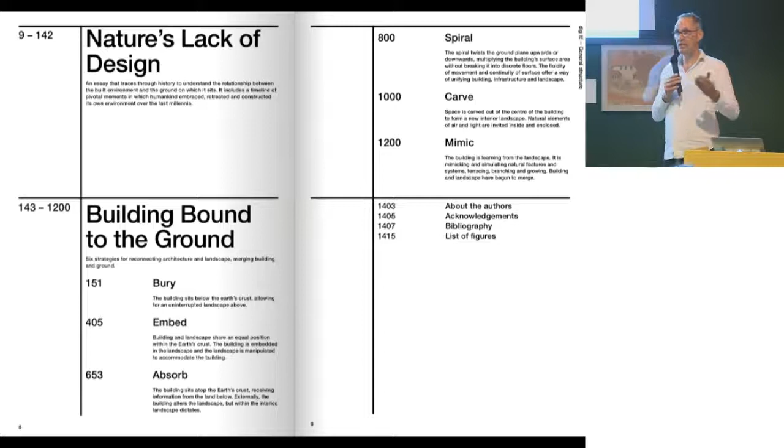And so my question was, how do we deal with that? And then through the history of building, I found out that we sort of took ourselves a bit away from the crust of the earth. We started to first dig in, or build on top, or use a few stones or a few branches or a few leaves or grass. And in time, we freed ourselves from that crust of the earth, from nature. In many ways, we thought we don't need nature anymore. We have to push it aside. We have to kill it. We have to use it to our own best interest.

And of course now we are at a moment where we think, hey, wait a minute. I think we lost something, or we are going to lose something. So we need to reconnect. But over 11,000 years, we have sort of disconnected ourselves from our planet.

And we found out that 1964 -- it's no coincidence that is my year of birth, but of course I just took that moment -- is quite precisely between 1959, the first time we set off to the moon but didn't go, and 1969, when we got on the moon. That 1964 is exactly in the middle. It was in this process of leaving the Earth, almost at the moment that we made the first photo seen from a distance of the Earth, that we could say, hey, that's us there. That amazing picture, not of sunrise, but of Earthrise. It gives you goosebumps if you think about that.

But it was also the only year in the history of mankind that our population growth was above 2%, for one year only. It grew to 2%, so we grew like hell, and then it dropped again. It's a pivotal moment in nuclear thinking and in many other ways. It's also a moment where you could say the building was isolated from its natural environment to the maximum. If you look at Arne Jacobsen's project Vattenfall, and there are many more from the 60s, it had nothing to do with its site. It was just put there, and it only uses the crust of the Earth for foundation, for gravity.

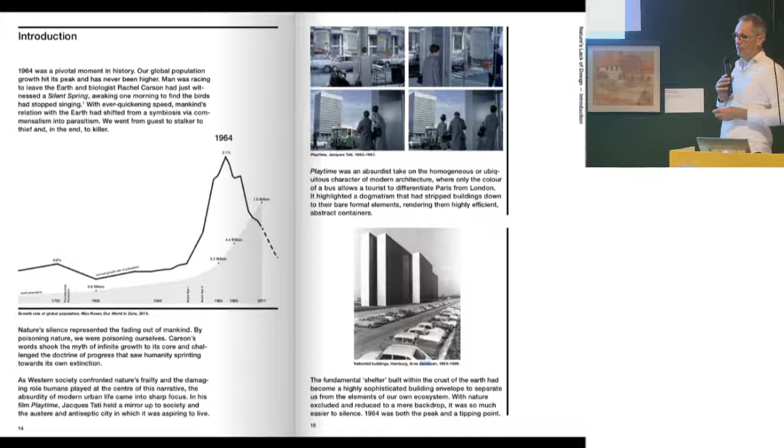We have continued that, and there have been voices all the time, but we haven't acted. There are, of course, thousands of reasons we didn't. And now we're in a synthetic landscape that has grown so extreme it's hurting the globe. We know it, we know. Enough about that.

Well, to come back to Prouvé, he, for example, used techniques he'd worked with in the war, like a little jeep, and this is his house. He just put it together with some strips. He drove up the hill, cleared a little site, and built it. It's extremely light, almost like a tent plus, a little bit more than a tent.

Well, it's still there, and it's a gorgeous house, really beautiful. He didn't destroy the site, didn't excavate, only cleared a bit. So you could say it's almost like you could have lived with simpler techniques 6,000 years ago. It didn't change that much. We could have continued like that, but we did not. This is what we did.

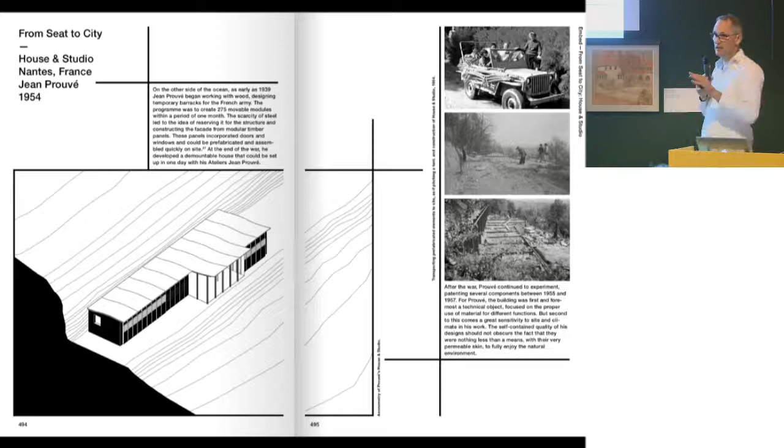This is sort of the first concrete invented building, and then later Zehrfuss, the French, like this. This is a Russian film. It's in fact sort of an opera.

I don't know if you know the film Playtime by Jacques Tati, a beautiful film that criticizes and ridicules modern life. A woman looks at a poster in Paris, then turns back, hey, that's London. The only difference is the bus, the green bus, but the architecture is exactly the same. Then she opens the door, and in the reflection you see the Eiffel Tower passing by. It's amazingly beautiful, of course.

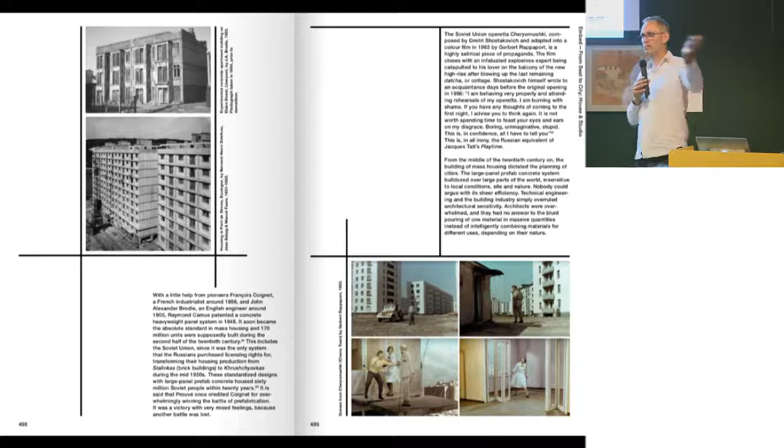Well, that movie bankrupted Jacques Tati, but there was an earlier one, with music by Dmitri Shostakovich, who excused himself for the terrible quality of the music. It's a hilarious idea of an explosives expert from Russia who, at the very end of the opera, explodes his own dacha, his old house, and through the explosion he's catapulted onto the balcony, and then he kisses his wife. At a certain moment he comes onto this balcony.

Also a hilarious movie, quite brilliant. I'm not sure if Jacques Tati saw it. Maybe he did, and that was sort of an influence. But this is reality nowadays.

And then you can also question, well, how do we look at things? Plastic, we think completely differently about this cup now than two years ago or five years ago. Traveling, about whatever, it doesn't matter. It's quite interesting, because this was like the new world. This is how we're going to live. Villa Savoye, Le Corbusier.

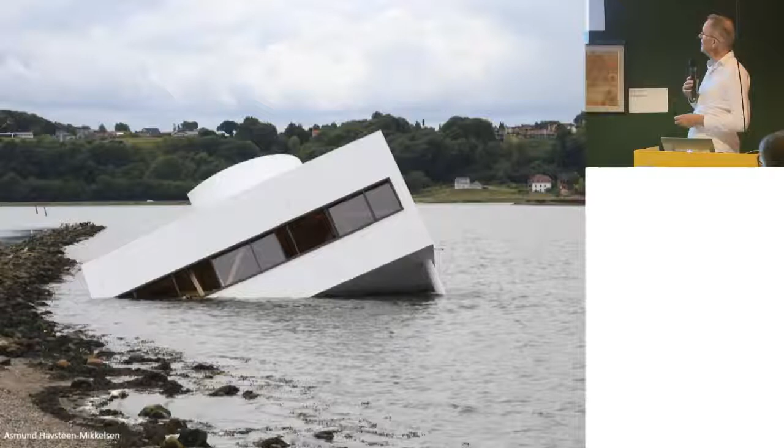Recently I was there a couple of years ago. Amazing, I mean, like an amazing... it is the future. But this future never came, not because of the quality of the architecture or the quality of light, etc. But life is, of course, much more complicated and much more interesting. It's used also by artists.

Somebody called it, the name is, you read it: Asmund Havsteen-Mikkelsen, who put it in a lake, as if, this is of course not the real one, and it's used also like this. I mean, it isn't deteriorated, this is just photoshopped by another artist, Xavier Delory. So it says something that different artists have used Savoye to sort of kill it in a way, and you could ask yourself why.

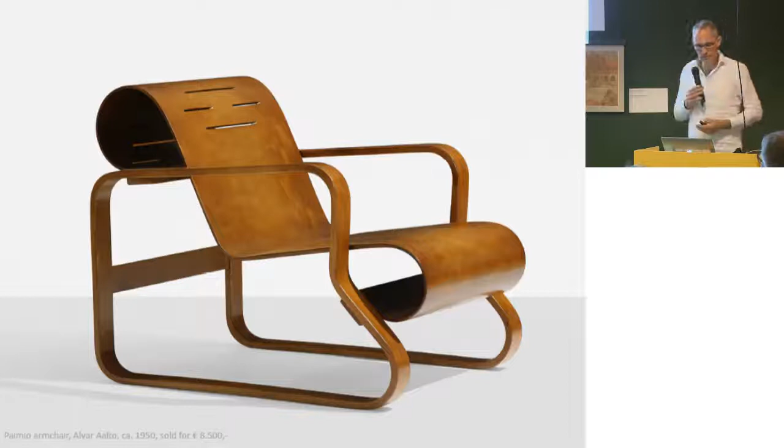So we have to rethink materials quite a bit, and that's what this evening is also about. It's about building, you say buildings in wood are better, or could be better, or maybe it's a solution. It's much more a discussion about using other materials than what, steel, concrete. So I think there's much more behind that whole idea of let's promote wood. I think it's about let's promote another way of living.

And you also see this Aalto chair. On auction, I think it was like 8,000 to 9,000 euro. It's just a crappy chair of wood, you could say. You could look at it like that, let's say. But people pay a lot of money for that chair.

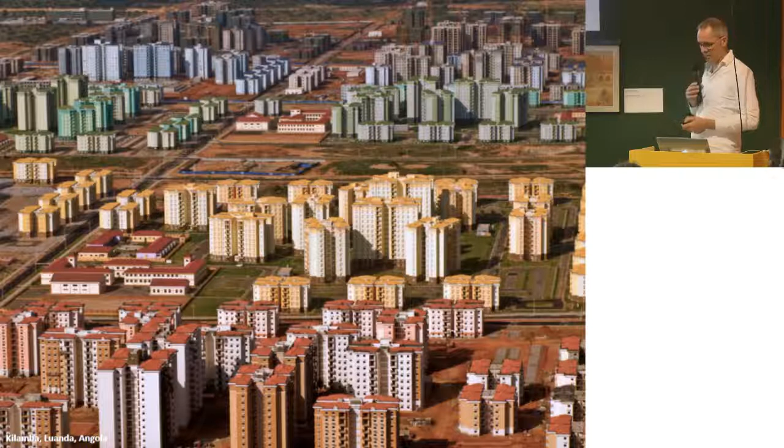First of all, you can drop through this immediately, but you can't get on it. This is not a model or something, it is really a photo. It's a still from a film by the BBC who is driving through it. Nobody wants to show it. It's a ghost town, nobody lives there. They have hard times to sell it. It looks really, so it's a business model.

And I think we first have to kill that and then talk about how we're going to build. So talking about let's build more in wood is, for me, I can tell you, and we can all agree here, it will never happen. It will only happen if we change the rules in this world. And if we change the rules, then we are going to be able to change the way we build and live, etc.

You do need a level playing field for the whole world, more or less, or for the whole Western world, to be able to do that. Otherwise, there's always somebody who sneaks around the corner and says, I can do it cheaper.

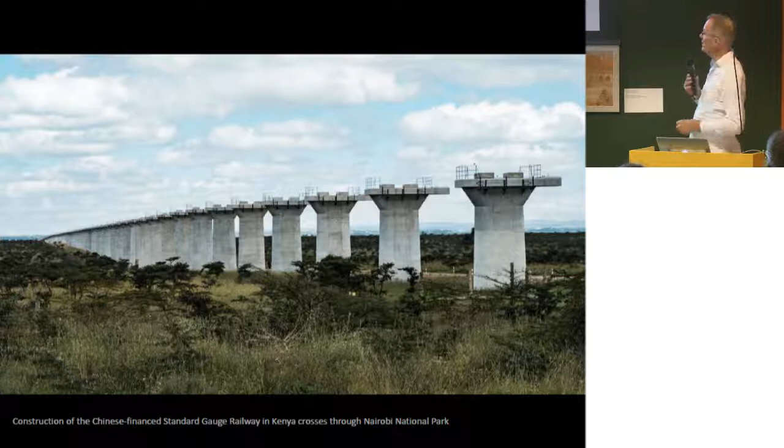How do we deal with that? First of all, as I said, it's quite troubling times to be able to work in a way that is also morally and ethically sort of okay, because many clients are in it for the profit. They are in it for the building share, for the market share.

And at least in Holland, architecture is pushed out completely. So now it's a business model, and then, okay, sometimes they need an architect to do it. But quite often, as long as they have found out how to do it really cheap and really fast, they don't need that architect anymore. They just do it without. They copy, paste, they multiply.

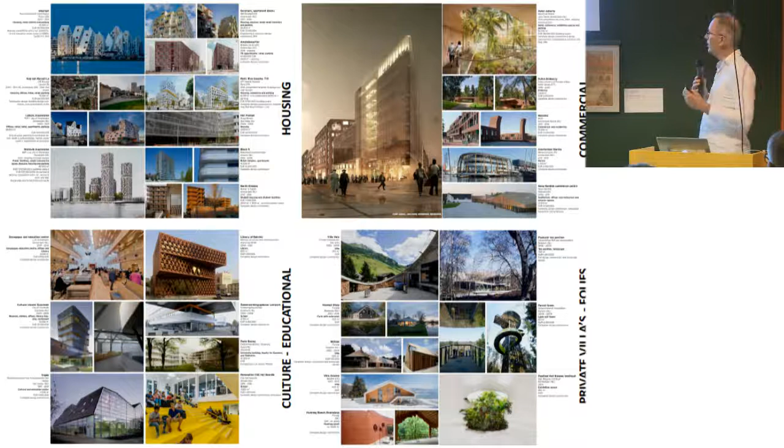But we have been extremely lucky that we also have found private clients to do special stuff, or commercial hoteliers, I will show you in a minute, where either the client or the municipality simply, and that's what really happens, says, you can only build this hotel here. There's a hotel stop in Amsterdam. You're not allowed to build hotels here, for example, unless it is extremely sustainable and it adds something to the city, and you tell me why. And then you see people start to think in a different way, because they know they can't build the simple concrete steel hotel.

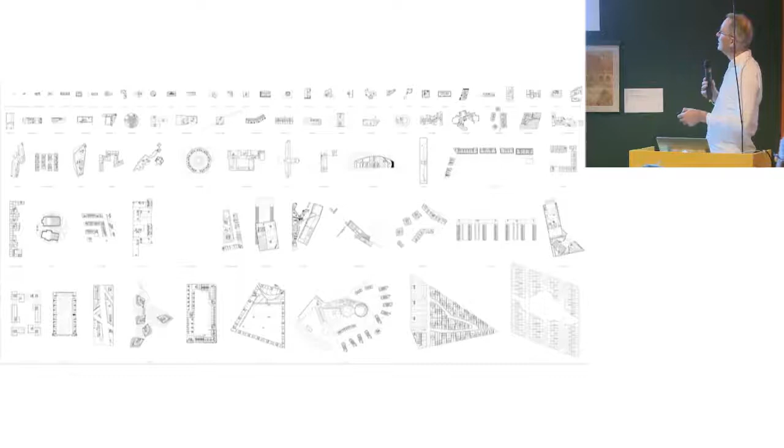This is all what we did, project from really small to really big. A 10, 12 square meter kiosk in Amsterdam, and then big projects up to 110,000 square meters.

And then, yeah, how is wood in this? With wood comes also prefabrication, because in-situ timber constructions are extremely rare. So it is also about, and that is in a way a very interesting change, that the idea of the house as a machine, as Corbusier intended, or Prouvé, or Eames, it never really set off. It never really ignited a real change.

But nowadays, with the robotized construction methods and CNC mills and much smarter factories, the whole computerization of building brings it in much more. We have a few advantages now to build in wood, instead of this old-fashioned pouring concrete thing with a lot of dust and a lot of CO2 production. So there are a few advantages. That is good, at least.

We found out that these are all the projects, from black, where there is no wood whatsoever in it, to completely white, where it's only made out of wood. This is a timeline of our projects. It was 1992, and this is 2019, and you see that it's getting whiter. So we are doing much more in wood and prefabrication nowadays. There's a real shift.

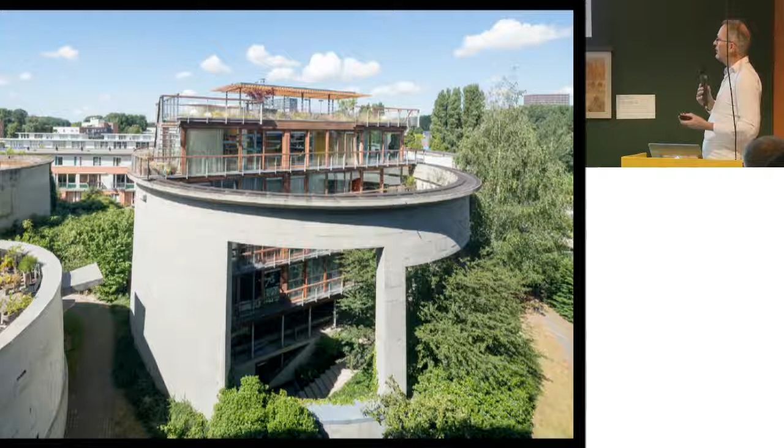Because we just cut it open and said it has an extremely strong foundation, so we can use the stability and the foundations, and then we build something and that's it. So it's sort of fun to do it.

They thought it was not fun because the neighbors across the street came in with baseball bats and kicked out the construction workers the first day. They were so mad that the sewage tanks would stay instead of go. But the funny thing is that these same people, who had to be separated by police from the construction workers, 2 years later opened the project - they loved it, they changed their mind completely. I was extremely proud that we were able to convince them in the very end that this is fun. And now they have this amazing park in front of them, with some sculptures in it.

Here we also started with prefabrication, where you were able to do a do-it-yourself house, using blocks and terraces and things. We didn't know where it ended.

This was the first thing we built with wood - an oak wood structure in big trusses, big cantilevers. We thought this was a very sustainable building because we used heat regeneration, etc. Now, 15 or 20 years later, I laugh about it because the sustainable qualities of this building are completely outdated. But at least it brought us somewhere - it started something that we like very much. This is the structure, partly steel, partly wood.

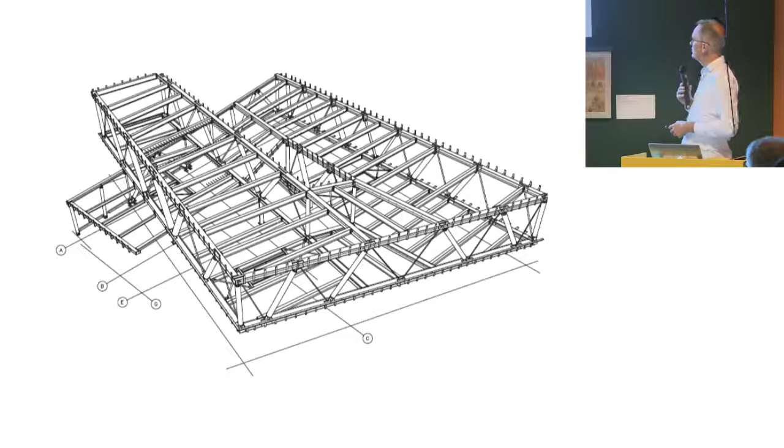And that is what it ends up probably being anyway in the building industry in the very end - we will always use steel as well, and we have to go a long way to really abandon those kinds of materials. But it's also about collaboration, I think. Since we're living with 7 billion people on this planet, and in the near future 10 billion, there is never one solution that's the good one. Is it electric driving? No, probably not only electric driving - it's a combination of things. Because whenever you say, oh soya beans are right, then 5 years later we find out that planting so much soya beans turns out not to be right. So in large quantities, nothing works anymore. I think we have to make a construction that is extremely much smarter. It's about smartness.

We really don't know nothing, we are sort of stupid. We like to design, but we research, we are detectives. Whenever they ask us something, we really go deep into it and come with a solution. It's about the doing thing, investing time and talking to producers until we have the solution. It's extremely about asking the right questions, a lot of questions, not only the right ones but also the stupid ones. Ask questions and try to find a solution out of a problem. So we experiment a lot, we research a lot, and then we find that solution.

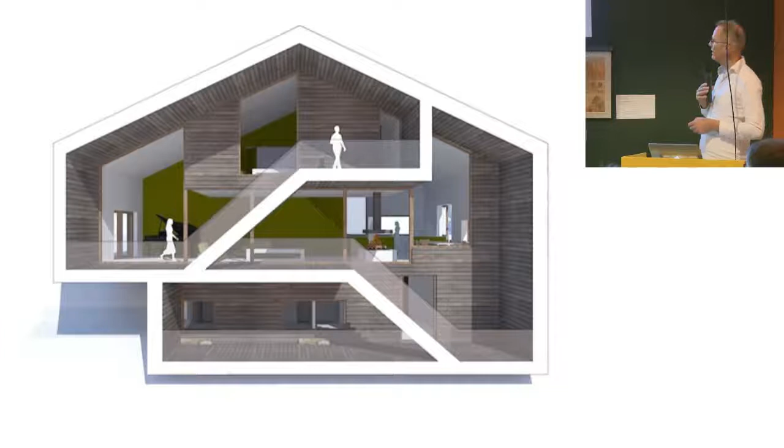So this is how we sort of deal with a problem where a client had already schemes from other architects and couldn't solve it, and it was too big, too expensive and too complicated. We simply brought it down to one small chalet, one compact chalet. The rich people nowadays build these sort of multifaceted chalets, like a car crash of 10 small houses. It looks terrible.

A car lover, he had problems. The solution here lied not in the house, not in the architecture, but he needed a road up to the entrance side of the house, and then he has to clean that road in winter himself. It's very expensive, and he has these Porsches he likes to race. I said, this problem with all that snow, I don't know how to solve it.

And we found out, well, just build the garage at the other end of your plot, because there's a road as well. We take an elevator up, sort of James Bond, very nice. Since then he was wax in my hand, like wax. He loved it.

He also didn't understand that we put a stair in front of his view, his most beautiful view. But that's of course our sort of cliche as architects, that you would like to have a nice sculptural quality at the front of the house and at the back as well.

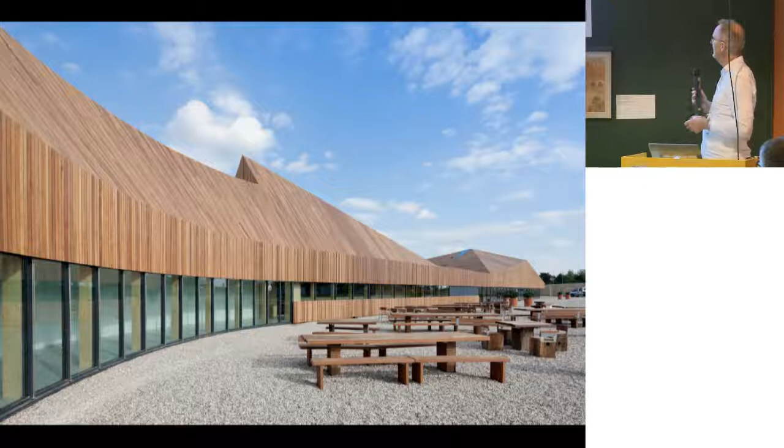So we continued our search for new constructions. This is Denmark, quite some time ago already. Experimenting with an idea of 10,000 square meters enlargement and still having the old barn as the main building up there. And again, we played around with CLT and wood constructions to come up with a solution that pays tribute to the wooden barns you have everywhere in Denmark.

So that was a bit what we did around construction in wood. It went everywhere, it didn't have a real sort of perspective. But yes, it's an extremely nice material to work with. You have a lot of freedom, you can tweak it, you can change it, you can glue it.

Here we did in Bahrain a small project, a small library. We wanted to make a beautiful wooden facade. Well, sometimes it goes wrong, because here they made it in sort of a fiber concrete. They changed it completely. And then, yeah, I mean, it's sort of okay.

But it would be nice to make this building much more intelligent, because they don't insulate buildings. You need to insulate buildings, not for the warmth going out, but for the warmth not getting in. So we wanted to make a building without ACs.

Or very simple, prefabricated - this is a synagogue that we built with mostly simple off-the-rack building elements that you can get in Holland. It was quite a cheap building. And we saved all the money for the shul, for the main synagogue space, to wrap it completely in wood. That's more or less a 7-arm chandelier.

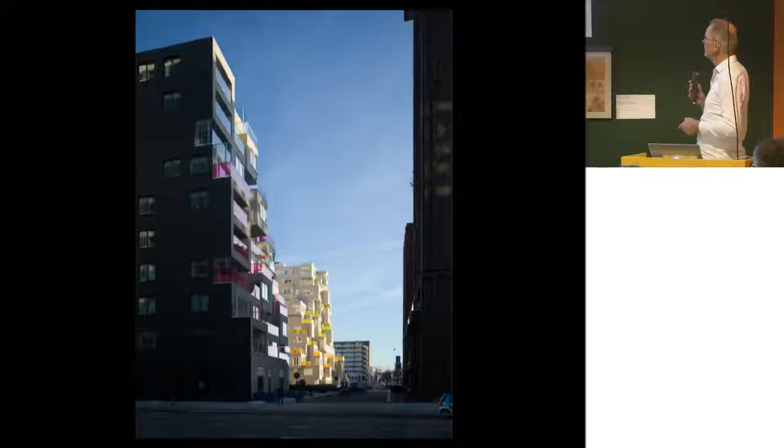So you see, it's a massive building industry, and it has an enormous power. And then the question is how to tweak that.

Well, then you can get a client that says, I want to have a new hotel, although hotels are not allowed anymore. But let's build something that adds quality and that is highly sustainable and that is also built in a different way. So we did this tender, and we won because of our approach on this.

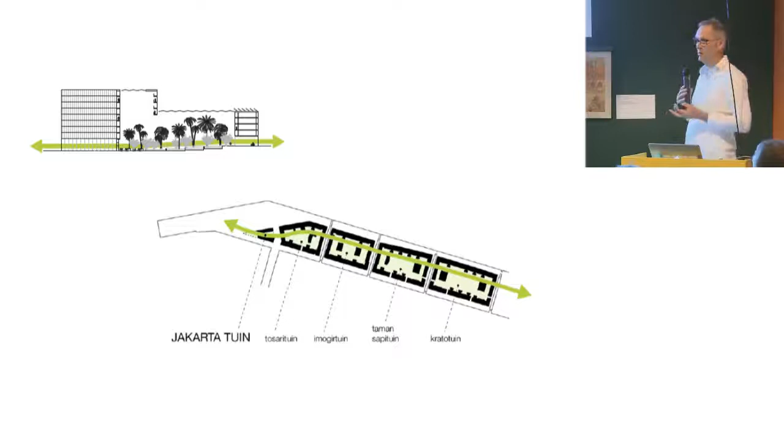And let's team up with the Hortus Botanicus. So the whole idea was not only about wood, it's about linking your building with the history of Amsterdam and Jakarta, of linking with a history of colonization and decolonization.

So we came up with the idea of building 180 units of full wood out of the 200 rooms. There are a few rooms that you can't build in wood because we needed to tip it off and add some corners. It was impossible. But here, like 80-90% of the rooms are prefabricated units, completely finished, and then hung in, and then tacked on.

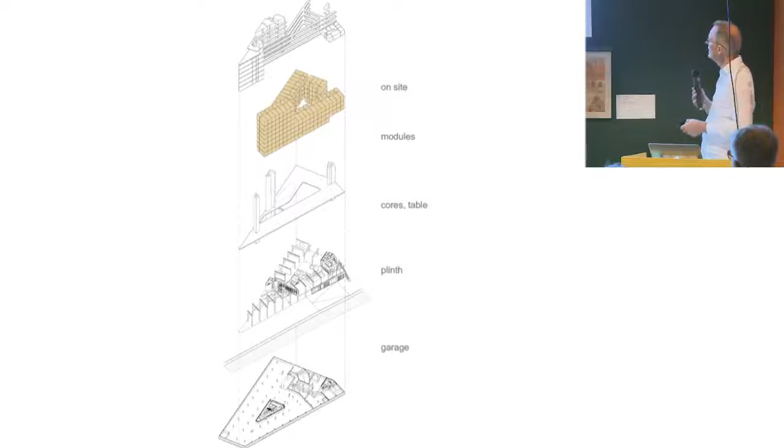It's sort of a plug-and-play hotel room. And see where we can get. And with this client, it was amazing because he said A, but he also said B, C, D. He really continued in this whole idea.

And we used the idea of a perimeter, one corridor, but then only on one side the rooms, because it is a very complicated site. Keeping open a huge space here that you can fill with auditoria and the banqueting hall and the swimming pool, etc. But having no daylight, we said, oh, let's not do it. Let's just fill it out until we are there, and then we keep it open.

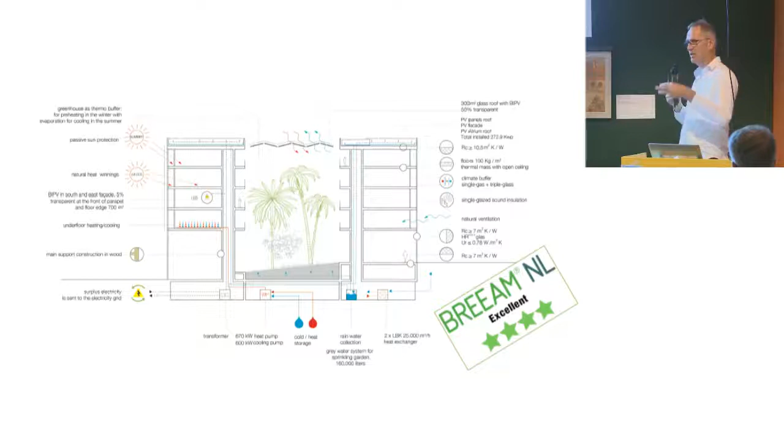We maybe use this idea of a little piece of Indonesia in here, this small jungle, and let's see how that can help the quality of life in that building.

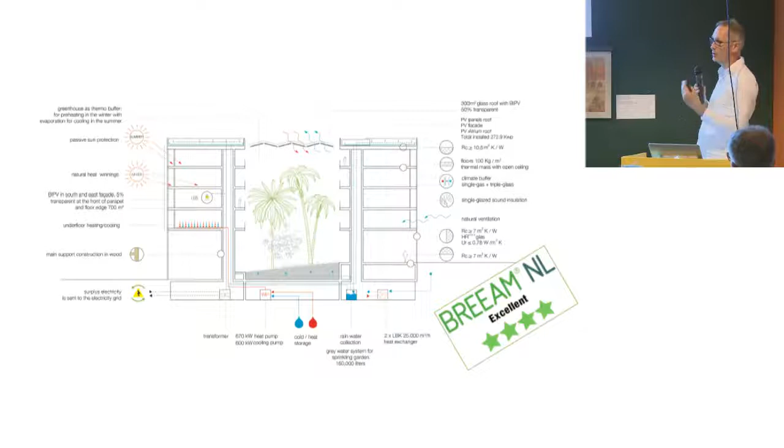It started at that, and we made this one scheme for the competition period, and it is amazing. This is one of the few buildings that we didn't change after 5 weeks of designing. It is exactly what we designed in 5 weeks. It was built like that, no changes. It maybe became only better in a way. It has 1,700 square meters of PV cells, so it is energy neutral completely.

And it's built in a very different way, and because of it is built in a very different way, it looks also very different. Not because it is designed like this, but simply because it is engineered like that. And we said when we built with cross-laminated timber rooms, there was one thing for us that was extremely important. We want to see it, not hide it behind gypsum boards or paint it or whatever. We need to see it, to show it.

So it's built with over 2,000 cubic meters of pine. And then we have finished it off, as in Indonesia, with all the finishings are bamboo. A fast-growing material, very recyclable.

So this was the drawing we made during competition phase, and that is exactly the way it is. So it wraps around a high bridge, comes down here, and then it's to the low quay and goes down under the bridge. It all connects at that level, and in these differences of levels, we have this sawa, this sort of stepped garden, where you now have amazing water views, harbor views.

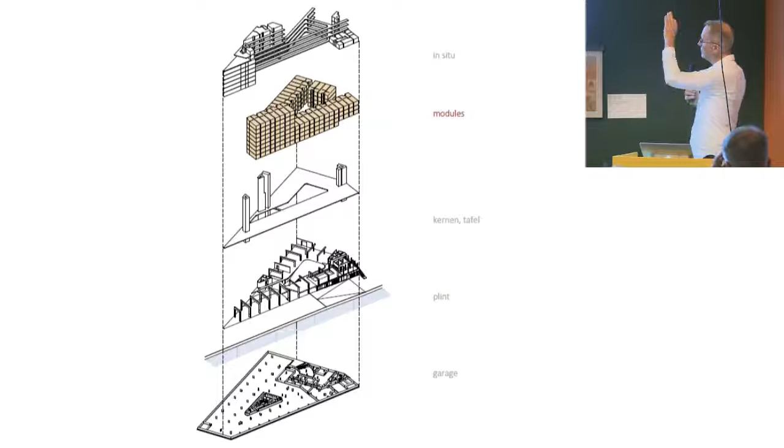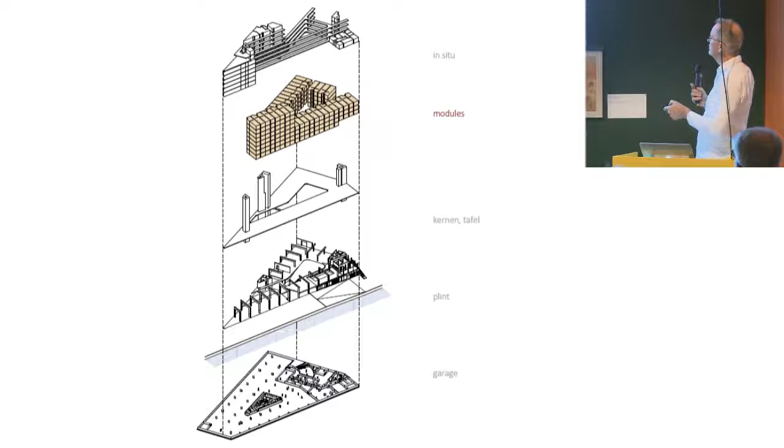And so building up this system altogether, as of this table structure of concrete with the parking garage, as of that floor, it's all structurally wood, so there is no other material that keeps it up to 30 meters.

And you see them being hoisted in. And funny enough, you see that building on site for the lower levels took about 1 year. I was quite amazed. And then they were able to hoist in this in 10 days. So then you saw in 10 days, it was all there. But since it was finished in the factory, it was also finished.

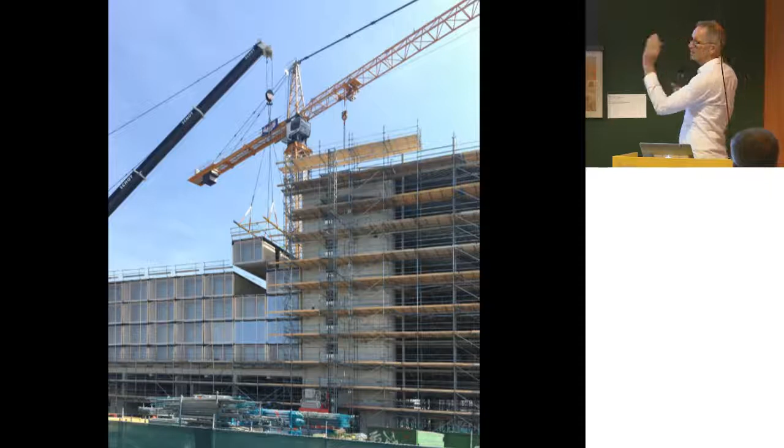And then they wrapped around this facade of glass, quadruple glazing. So this was all built in the factory.

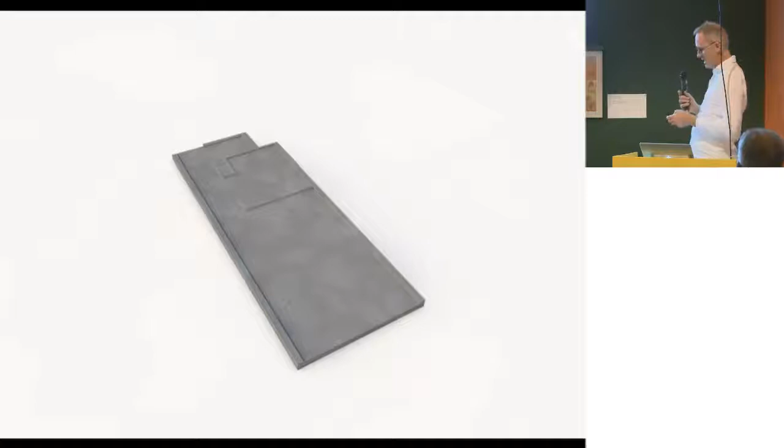We used a very thin layer of concrete for fireproofing, soundproofing and weight. But we needed only 1/4 of the normal weight because we also have wooden ceilings in every room. On that base we have cooling and heating in that floor. So it's like a smart slab.

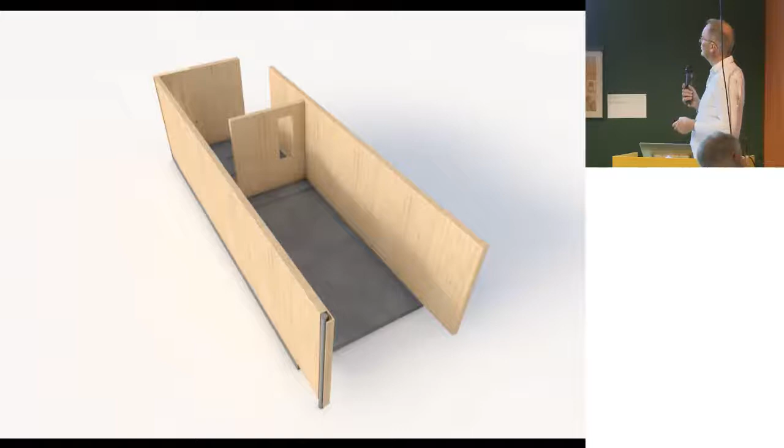And there goes all the material of wood in, also carrying the balcony, triple glazed window, bathrooms, single glazed balconies and PV cells that can be hoisted in like this with the standard units.

And as said, the suites, the most expensive rooms in the tip had to be made in situ. They could not do that because of stability in wood. So that very last tip is made differently.

And we topped it off with a sky bar. It feels like a glass house, so we're going to put in trees and a hanging garden. That's what we're going to make here.

For us, it's quite amazing how much this has ignited questions from other clients in Holland, Germany and France. We're having excursions here about four times a week already for more than a year. Where it brings us, I don't know, but it's amazing to see how many people are interested in this sort of change. And I think that's the most important thing, that we don't push it, but that we wait for them to come to us and say, yes, you better do it this way.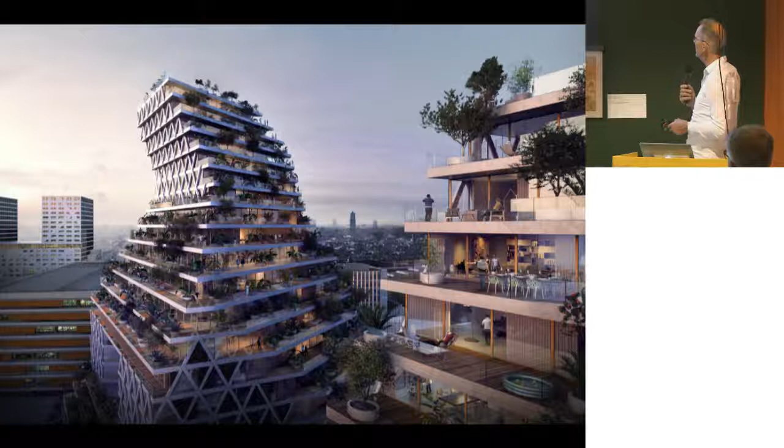So these kinds of projects now pop up where they want to experiment and try to make this sort of healthy urban quarter in wooden towers. Where this ends up, I don't know, but the engineering will take quite some time.

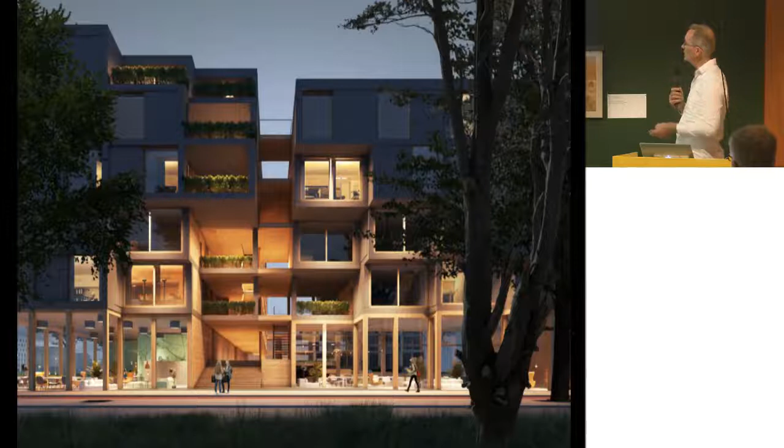But at least the first project that we tendered and won is this one, which we're now going to do fully in wood, 60 apartments. I think it will be a hell of a job, since apartment building in Amsterdam is extremely cheap. Your building costs are extremely low, although prices are high, but most of the money goes to the municipality for land lease. It's a very rotten system in a way, because whatever you want to put into quality of building is taken away and goes to land lease. But we're working on this very hard.

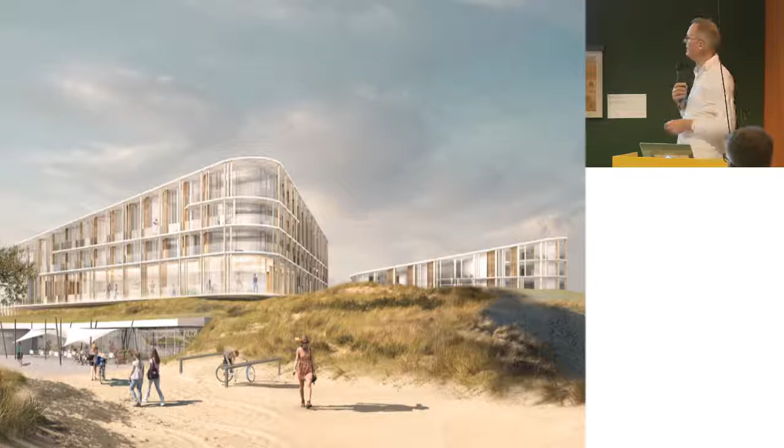And also in hotels, in very difficult areas along the coast, we are asked to work with the same type of building system. This is a beautiful dune area. There's now an old hotel that uses an amazing amount of oil in its heating system. It's worn out, the rooms are bad, and they want to just tear it down and build a new hotel. Everybody is against it, but we are now a couple of steps further.

The people living in that little village are in a way very happy, because we also implement a lot of extra services for them. For example, the supermarket is gone, there are no restaurants anymore, there's nothing. And here comes a restaurant, a bar, a shop, a swimming pool, a spa. So you can keep up the services of a small town.

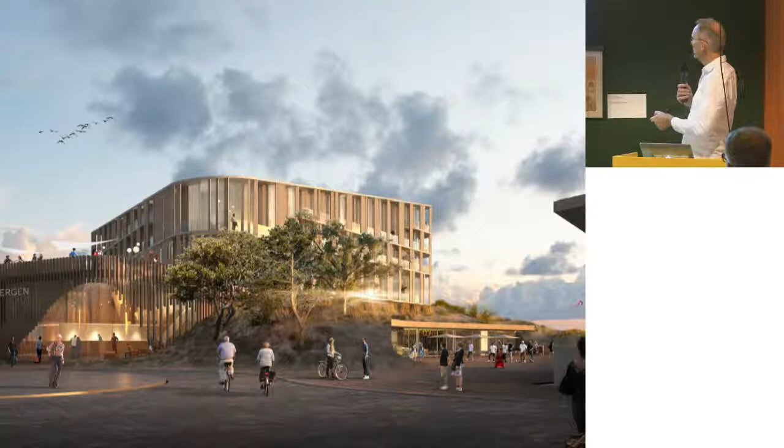And we want to build this also in prefabricated units. This, for example, is an existing element in that dune already. We are not building it ourselves, but we're going to refurbish it. And then on the place of the old hotel, we want to rebuild a new one, bringing back about 1,000 square meters of dune landscape by making it much more compact.

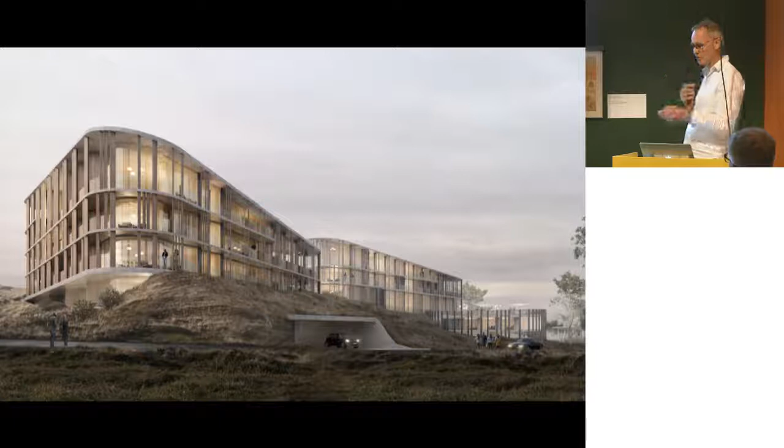We have learned a lot about how to organize the building site, because that demand is extreme in Holland. It's about speed and it's about money.

And there is no money for it. So the question is, how can you make something that is prefabricated, that is in fact like a container building, but make it in such a way that it's even better than standard housing?

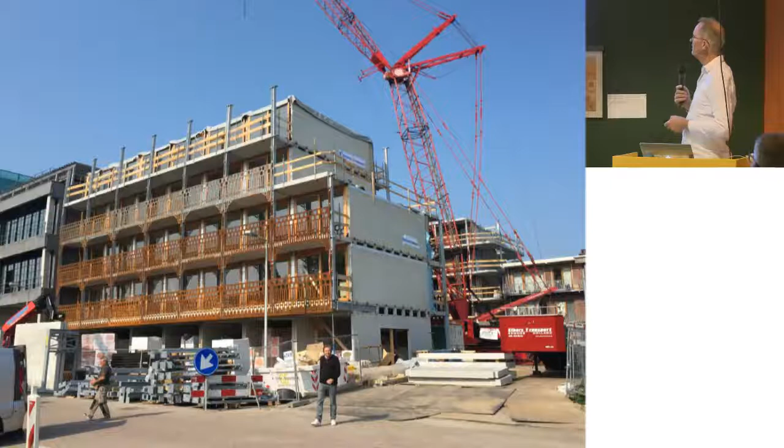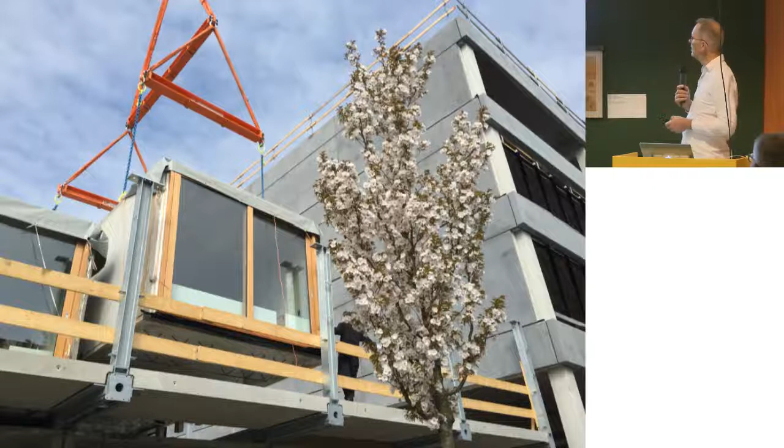We would like to continue this experiment with better materials, better quality. The good thing is being able to service young people with a unit like this, with a high quality interior, all the services, a balcony, good light, and a beautiful view on the river. I feel ashamed for the size of it, but on the other hand it was full immediately and people love it, so who am I to say otherwise? It's quite interesting to see these kinds of changes.

So up to here it's completely industrial, and then there's this wrap-around skin. That has brought, at least in our neighborhood, a reduction in burglaries—we had a lot of break-ins into cars, and in my office as well. Since this is there, it stopped.

That's also quite important in life, isn't it? Well, thank you very much.

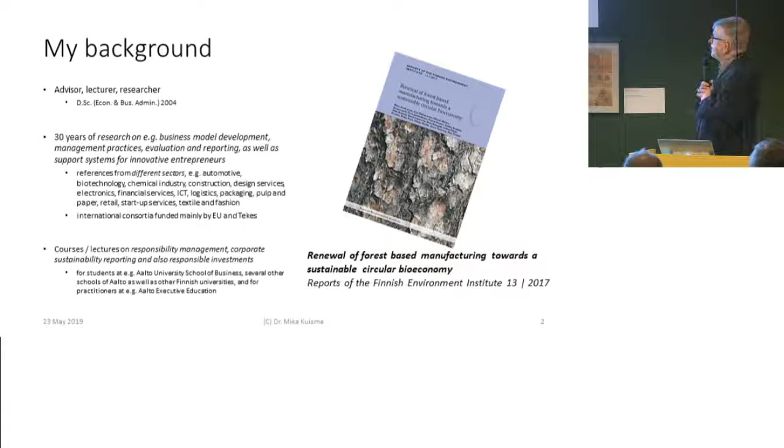I was personally responsible for the part that focused on tall wood buildings. We had two other interesting cases too: one was textile and fashion, and the third was biorefineries, or as you might call them, pulp mills. Okay, let's start with a very brief history of tall wood buildings in the Nordic countries.

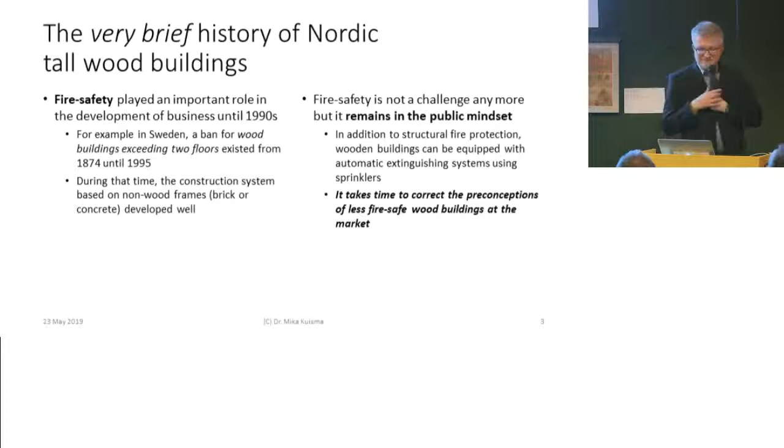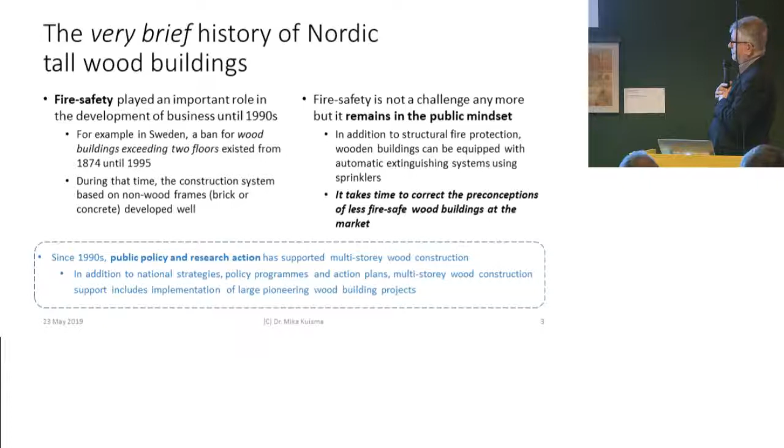Since the 1990s we have had several policy strategies and things like that, and also research actions that support this industry, the emergence of tall wood buildings in the Nordics. And well, what have I? Yes, of course, we have had pioneering projects too that are important to mention.

But I think most of you share the view with me that at the moment we are living in the middle of a Nordic wood construction paradox, because when we go out, we can see trees everywhere. We are living surrounded by parks and close to trees, and surveys say that people like wood as a construction material. But in tall buildings, wood has not been a successful material so far.

In terms of market share, concrete is very dominant, both in Sweden and in Finland. I wouldn't like to say any numbers, but I think the market share of concrete is something like 80%. Am I correct? Have you any idea? In multi-story buildings in Finland, the market share for concrete is 95%. Oh, it's even more than I guessed.

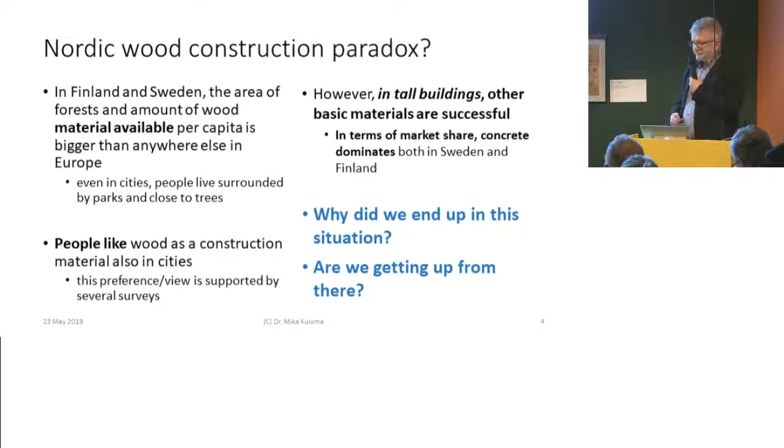Okay, this is a very statistical and scientific presentation compared to the other. So I'm presenting findings from analysis I found mainly in two sources, puuinfo.fi and the Ministry of Employment and the Economy. This is now about tall wood building projects, so we forget one-family houses, log houses, summer cottages and things like that. We are talking about blocks of flats, office buildings, hotels and constructions like that.

The data here comes mainly from Finland, because we couldn't get similar data from Sweden, and since we're in Finland, I think that's most interesting for the audience. I haven't used the latest updates, so the data is mainly before 2017. If you want the latest updates from Puuinfo, you can go to their website. I've been analyzing these tall wood building projects in terms of location, start year, year of completion, number of floors, number of flats, the principals behind the project, the design and planning actors like architects, the material suppliers, and the construction companies involved. So let's get started.

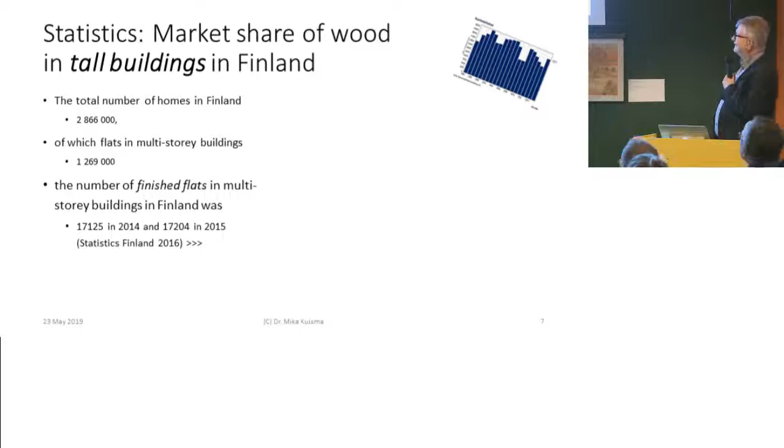So we could say that in multi-story wood buildings, more than 2 floors, it's less than 1%. So that's the sad fact. I would say sad, because I would personally like to see more tall wood buildings.

Okay, then according to year of completion, we can see a sort of U-curve. In the beginning, before the millennium, before 2000, we had 7 projects, and one period here is about 4 or 5 years. We can see a slight decline in the number of projects until 2010, and then growth starting from 2011.

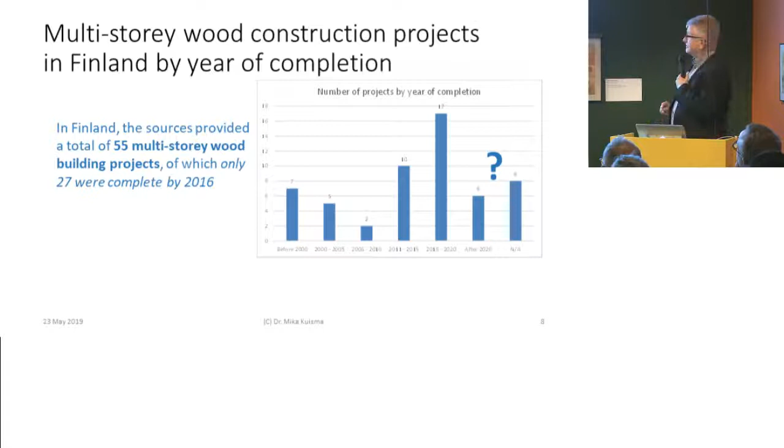This is, I think, personally very interesting to consider. What's behind this, the reasons for this decline and then the growth? Could we say the boom already? If we have 17 projects, is it a boom compared to 1 or 2? Okay, but anyway.

These are my personal considerations now, what factors could perhaps explain the decline after year 2000 or so. Perhaps it's still a regulation issue, so people were still thinking about this fire safety issue. It might also be a technological issue, so the solutions for wood construction were less developed, and so was the know-how, structures, things like that.

It's also about costs or price of the building. I have the impression that they were quite expensive solutions at that time. And of course, then we can take the mindset of the construction industry, so we can say that interest is not that high. It still isn't very high, and values are rather conservative.

And then we can also think of a term that can be called path dependency, meaning that the construction industry has invested very heavily in know-how and other things related to concrete, and this is very hard to change, or it takes time to change that. And of course, competition from other basic materials, this is something we have already talked about.

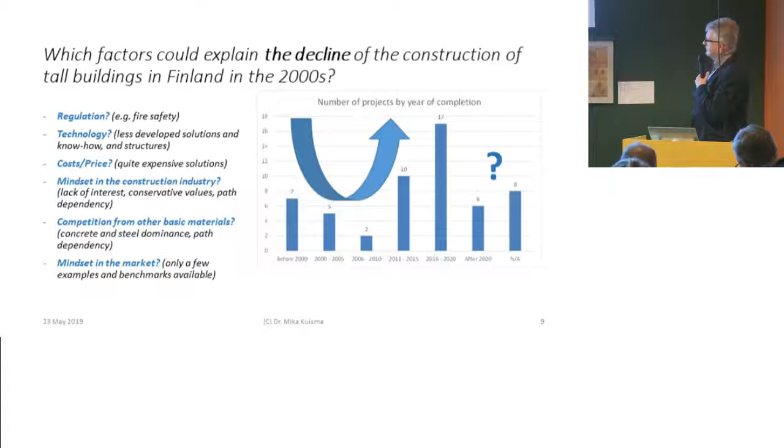And then also mindset in the market. I think the fact is that when we have only a few examples or good benchmarks available, it has an impact on the mindset in the market. Nobody wants to have or live in a wooden flat until you see that there are enough good examples, successful examples. Okay, this is the first part of the evolution.

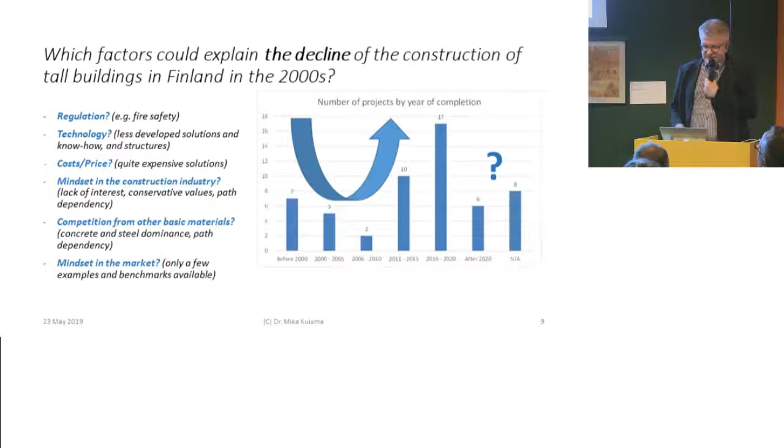But then after 2010, this decade, again my own considerations, what might be the reasons behind the little growth or even boom here in the industry during the 2010s. I think this fire safety regulation change is now starting to work, actually, especially in Sweden, but also here in the mindsets of people. And then also we have had some technological developments, for example modularity and material innovations like cross-laminated timber.

They are already available now, and also price, it's not so costly anymore. Then we have ecological factors that were not so important around 2000, but now people realize that this also has something to do with climate change mitigation.

Then, as I already mentioned, we have had government level support, strategic programs and organizations like that. And then we already had some good examples available, so we had some completed flagship projects and positive publicity for those projects. And perhaps also we had some kind of market pull already, so that consumers' preferences and demand for tall wood buildings was starting to grow.

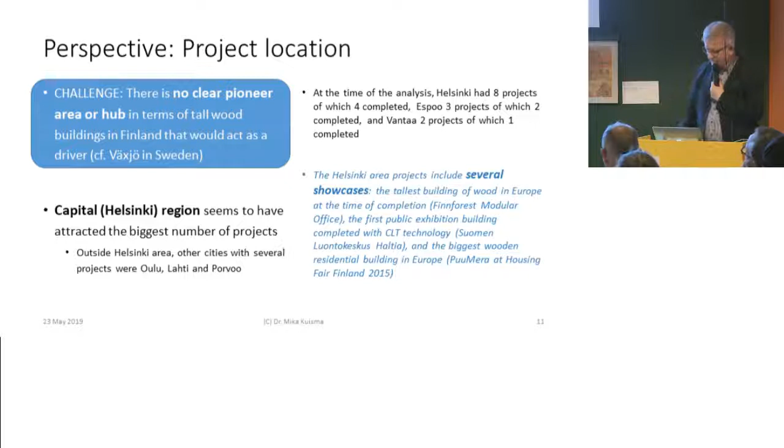So in Finland, Helsinki region seems to be the kind of hub, but still we don't have so many projects or benchmarks or showcases available here. I've picked up some examples: Finnforest office in Tapiola, then Suomen Luontokeskus Haltia, which was completed with CLT technology. A couple of years ago we had a housing fair in Vantaa, where Reponen built the biggest wooden residential building in Europe in 2015, which I think is a very good benchmark in terms of market development. But anyway, we are sort of lacking a driving force here in terms of a pioneer area or hub. Still, in the Helsinki region we have some good examples available already.

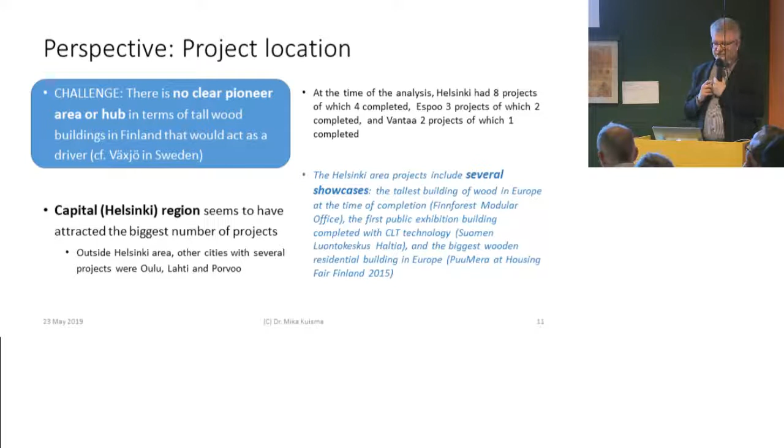One perspective that concerns architects: I could find that there were 50 architect agencies and other design and planning actors identified in the data during those 20 years or so. Now there's a challenge, or as an organization researcher I see a challenge here, because in terms of learning and know-how development, it looks a little weird that most of the identified actors seem to have references from only one or two projects. So it doesn't develop your know-how, and we're talking about learning curves. You're still on a quite low level on your learning curve, so we could say that such projects are more like experiments or pilots. It's not industrial level work yet.

I've had some names there, but I think we will skip them because time is running.

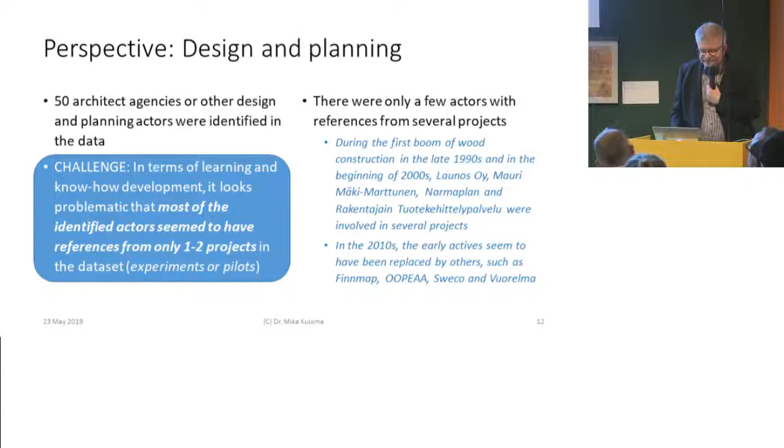The next perspective is about material suppliers. I think the challenge here is that it looks like the material suppliers don't have very much cooperation with each other. So everybody is working on their own - we have sawmills and other organizations, we have the very huge Stora Enso and some others, but they are not cooperating very much, at least from the surface - I didn't go inside the projects, but from the surface it looks like there's not that much cooperation. Anyway, it seems that Stora Enso's CLT, cross-laminated timber-based modular multi-story concept is sort of leading the change. Do you agree, Pekka and Petri? But we have some other actors too, and perhaps we'll see more cooperation in terms of material supply and development in the future.

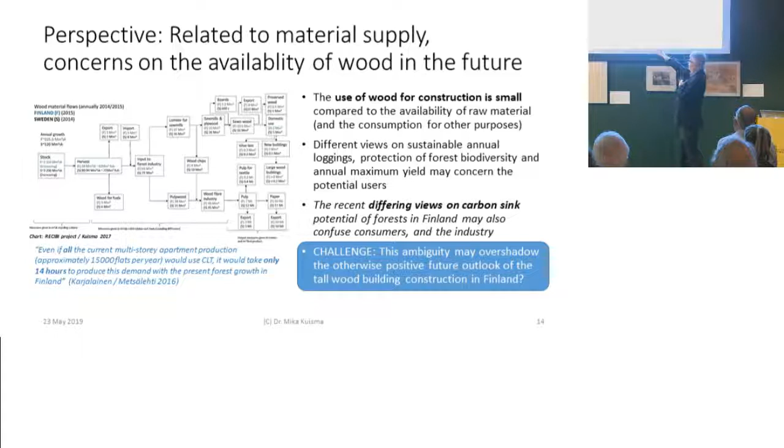Related to material supply, I'm a little concerned about the recent debate on the availability of wood in the future. Here's a quote from Professor Karjalainen in Metsälehti a couple of years ago: even if all the current multi-story apartment production, approximately 15,000 flats per year, would use CLT, it would take only 14 hours to produce this demand with the present forest growth in Finland. So this is not an issue.

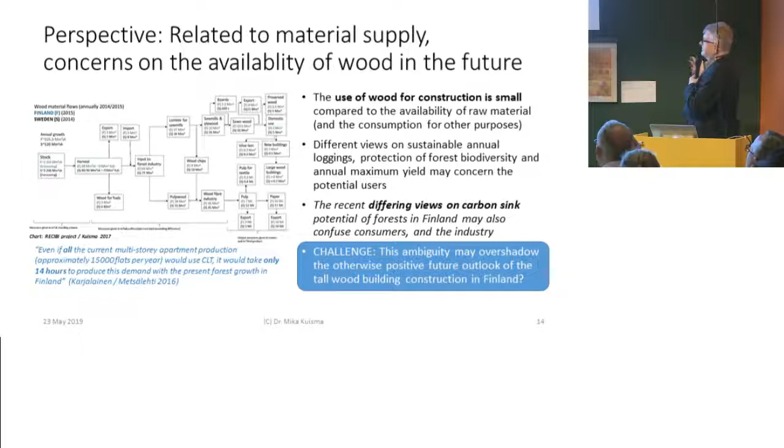So we have a lot of raw material available, but still it sort of confuses me that there are so many differing views on forests as a carbon sink and so on. If I were a dictator, I would say now decide what is the truth. But we've heard that different research institutes have differing views on this - how much can we cut so that we can say that annual harvesting is sustainable? Anyway, I'd like to stress that ultimately this is not a problem, but I would like to see this in a more clear way in the future.

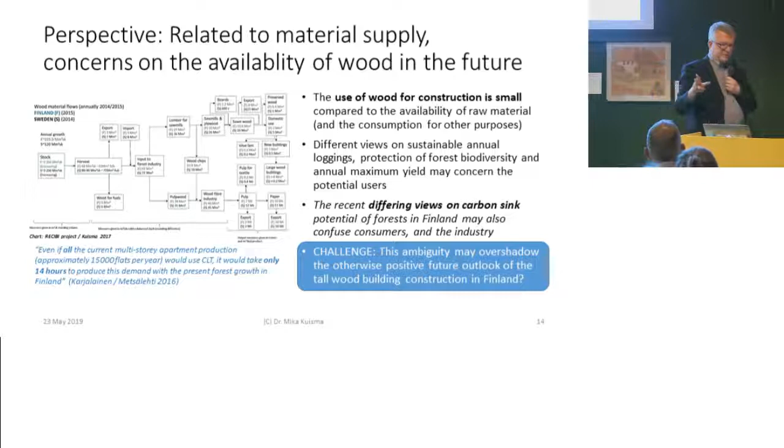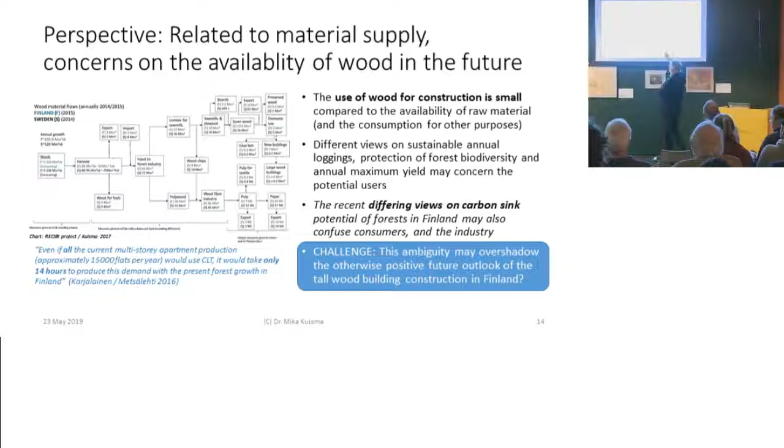I'm very worried about the discussion, because this may confuse the consumers and the market, because in reality we have a lot of material available compared to the volume that is needed. You don't see the little figures there, but this tells us that most of the raw material goes to pulp and paper production and exports. So this is not a problem, how much wood we use in construction - there is certainly enough in the Nordic countries.

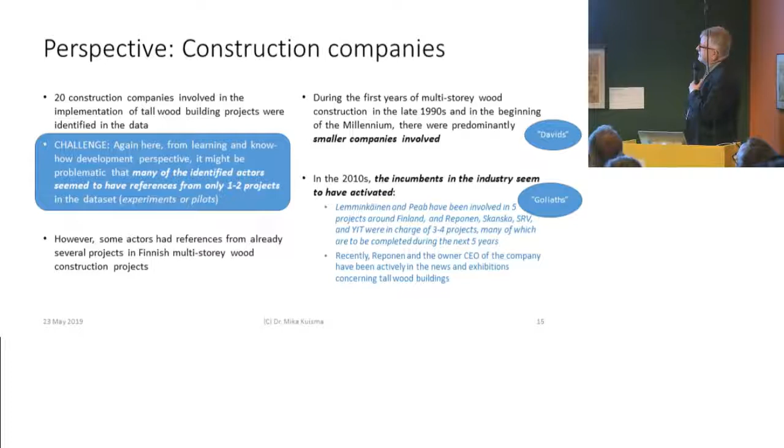Okay, and then about construction companies - one challenge again, similar to what we saw with architects and other planning actors: it looked like most of the actors here in construction seem to have references from only one or two projects. So again, this is something we can say is an experiment or a pilot. Another interesting fact is that in the beginning, during the first years, there were mostly small companies or smaller companies involved.

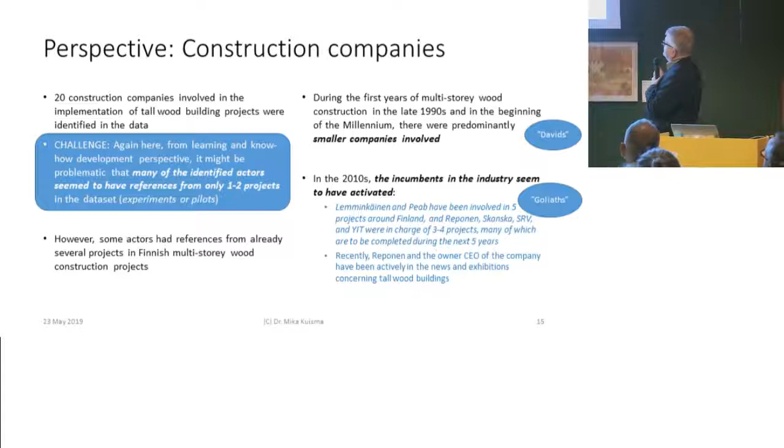But now in the 2010s, during the recent years, we see more and more big players like Lemminkäinen, Peab, Skanska, SRV, YIT, and players like that. This reminds me of some theorization about industry evolution, so that in the beginning it's normal that there are small companies, sort of Davids, and then during the evolution also Goliaths become interested in the issue, and this is very much true also in evolving sustainable businesses. This comes from the research of sustainable businesses, but I think it fits quite well here too.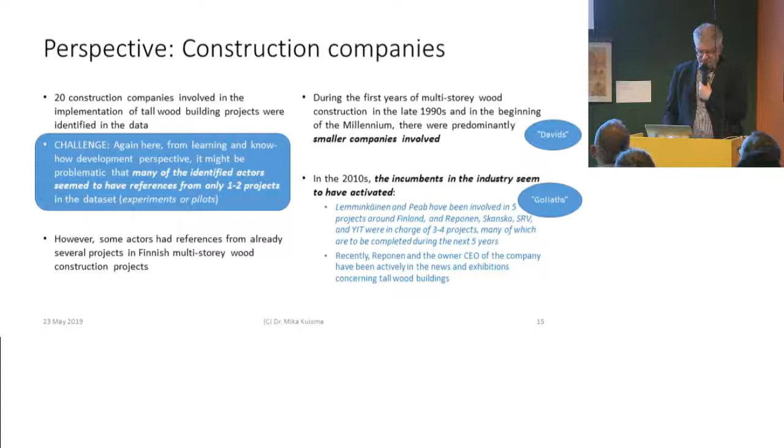Okay, then one more perspective, the point of view of building owners and users. When I was talking to real estate investors, it became evident that they don't care so much about the material. What they care about is return on investment, and their view is that if we want to improve the attractivity and profitability of tall wood building investments, the projects should be built in central locations. At the moment we have Wood City in Jätkäsaari in Helsinki, for example, that's a good example of central location, but mostly they are in suburban areas like Viikki and Kivistö. So real estate investors seem to think that it's too far away from the city - it should be in the center or around railway stations and places like that.

And then we were also considering the role of flat owners or users or dwellers, however you want to call them. We were thinking that there should be more dialogue with these users or potential users, so that you understand and respect their needs and preferences already when you start the project. But I think very often it's so that people just move in and then we think that it's okay like that, but it isn't. So there should be some kind of user engagement available, or more dialogue between the project and the potential users.

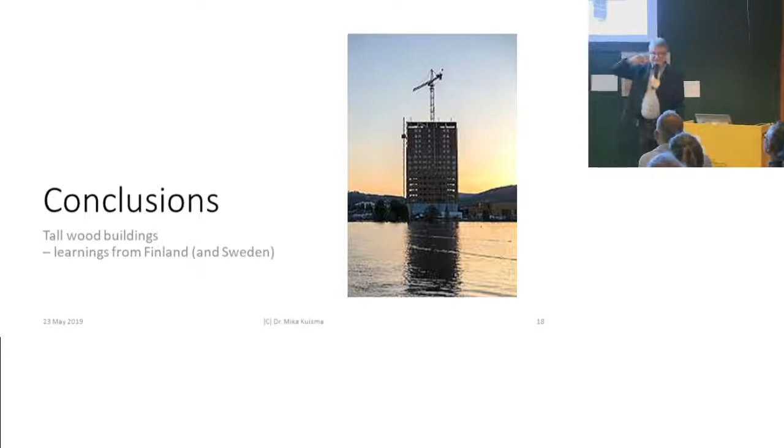Okay, then one more fact - I think it's pretty obvious that wood building projects are becoming bigger and the houses are becoming bigger and taller, little by little. But what can we then conclude about this? This is again the same building that I showed in the beginning - it's from Norway, and it's said to be the tallest at the moment, but I haven't verified that.

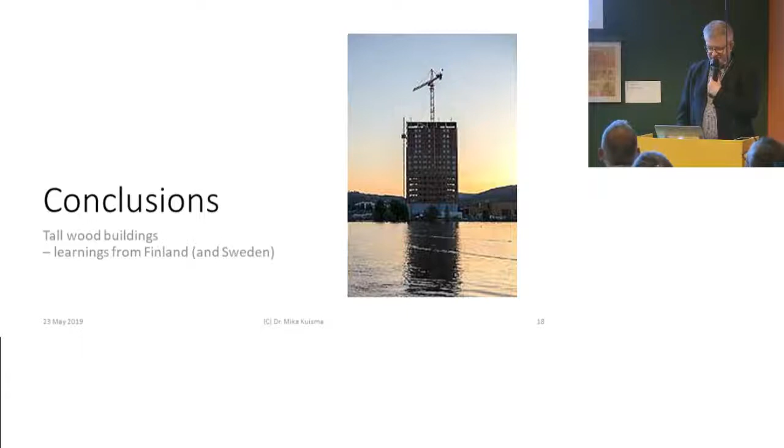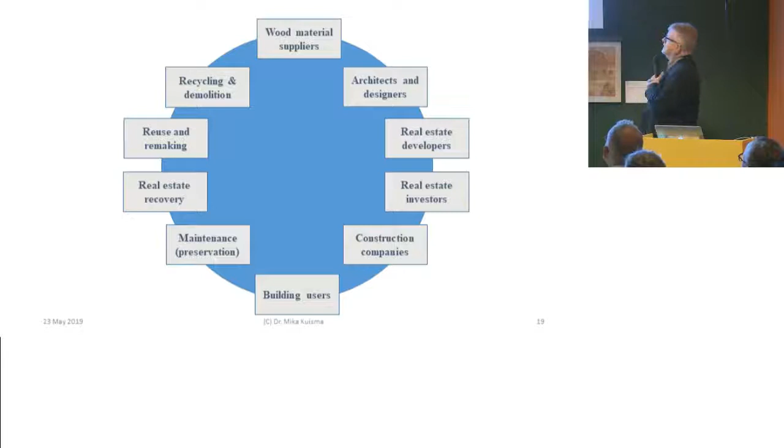So I have a chart here that should remind you that during the life cycle of a building, there are many kinds of actors that are needed or that have something to do with the project - from wood material suppliers to architects to real estate developers, investors, construction companies, users, maintenance firms, real estate recovery firms, reuse and remaking. This is the first time that I'm talking about circular economy now, so I would think that we should consider more about this reuse and remaking already during the start of the project. And of course also the recycling and demolition.

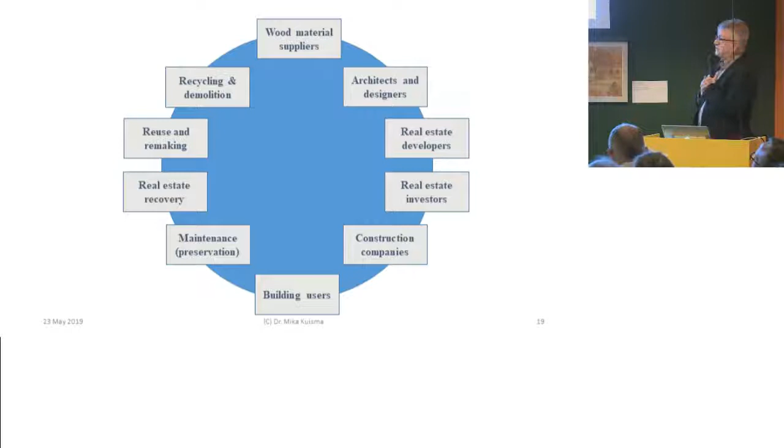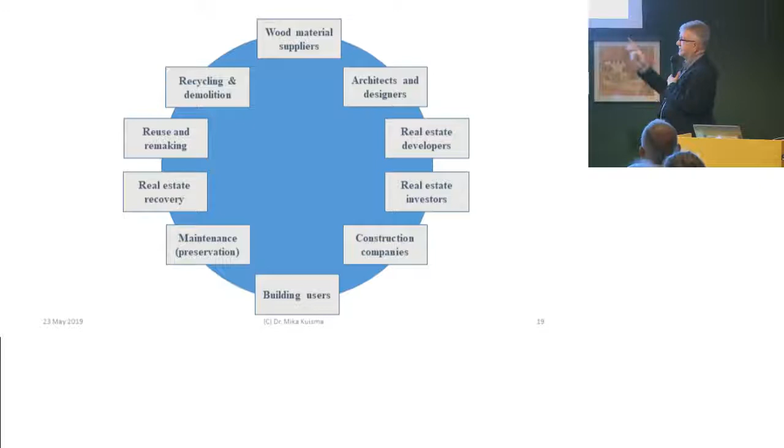So my view is that there should be more holistic or systemic view in design and also collaboration between these actors - that's why I have added these arrows there. But in addition, I think we have several new approaches in terms of technology and production, and we could also add more user orientation. So we have product innovations, modularity, industrial production available, and if we add also users there, the result would be better.

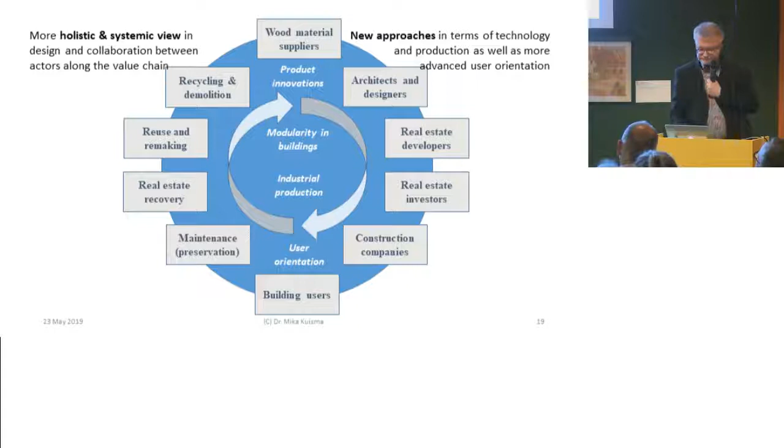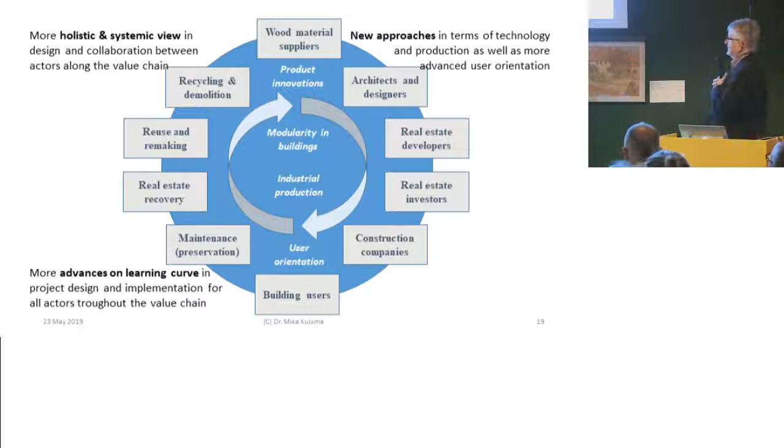And then we need more advances on the learning curve, meaning that the actors should have more than one or two projects to say that this is really an industry, and this is throughout the value chain. And then, of course, what is needed is clear communication of benefits in terms of sustainable development, because at the moment I sort of feel that it's a battle between wood and concrete, and then we have this confusion about wood or forests that I mentioned. So we need a clearer communication of benefits for wood buildings.

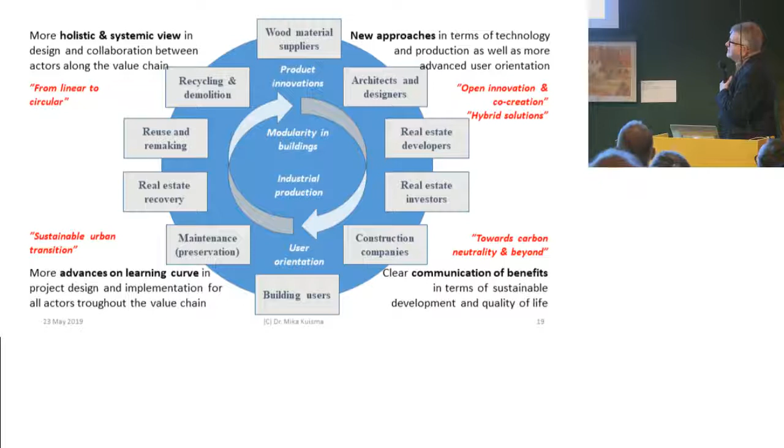Then we have concepts like sustainable urban transition, and I think this tall wood building issue fits quite well there. And then we have also this carbon neutrality discussion going on, and I think that wood buildings have something to give also in terms of that discussion already.

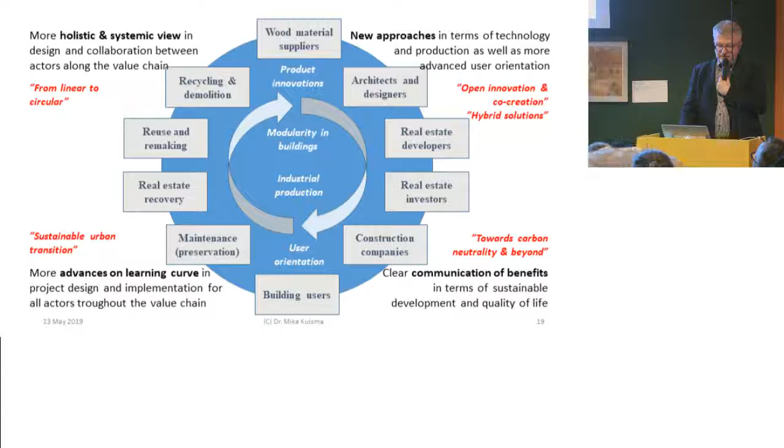Okay, then I have one more chart to go. I picked this up from a Dutch professor, Dirk Loorbach. He visited Aalto in Otaniemi two weeks ago, and at a conference there he had a presentation, and I sort of borrowed this chart from his presentation and modified it a little. But I would think that this might be something we could use in terms of the industry development for tall wood buildings.

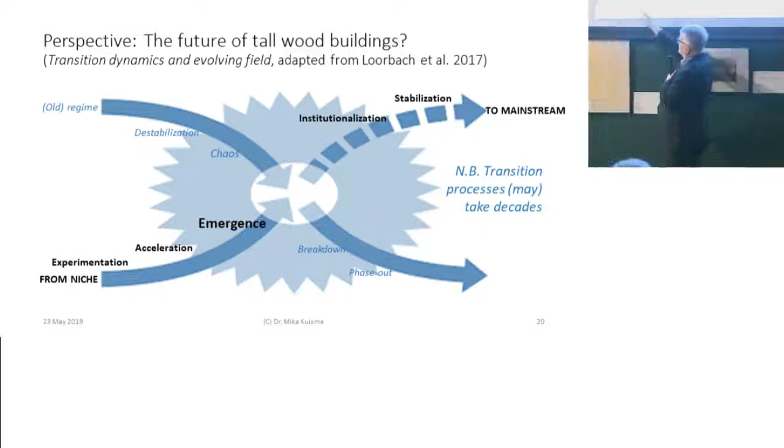So at the moment, we could think that the old regime has something to do with concrete, for example. And then tall wood buildings, we are starting from niche here. At the moment we have these sort of experimentations available, and it sort of looks that it's accelerating now already. But I guess we still have to wait for the real emergence of this industry for some years.

And at the same time, I would think that this wood building industry would sort of cause a destabilization effect for the concrete business. So this is now my very personal thoughts, and this is really borrowed from Professor Loorbach's vision. He didn't talk about wood construction at all—he was talking about sustainable businesses and sustainable transitions. But anyway, I would think that this might fit quite well.

So we would think that at the moment, in terms of tall wood building construction industry, we are somewhere here, and then some years or decades later we may find ourselves there in the middle, and then ultimately, finally, we could find ourselves in the mainstream. I have no idea when or how that happens, but I hope it is possible to reach and possible to happen.

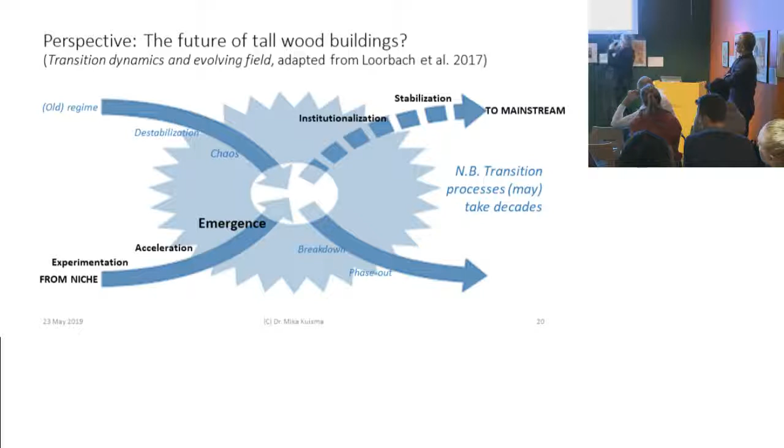Actually, I'm not a transition researcher, so I'm not quite sure about how this should be used. But anyway, as I told you, I think this fits very well here, also in this particular case. And I would think that it's possible that we have the emergence and then we start to disappear. Of course, it's also possible it doesn't have to be so that after the emergence comes the institutionalization and stabilization, and then we are part of the mainstream. And it's also possible that the old regime, they sort of feel kind of chaos around them, and then after that chaos, re-institutionalization and re-stabilization takes place.

This is a beautiful scheme that shows exactly what prefab concrete went through from the 50s till now, and what happened to prefabricated housing with other materials, because they had this breakdown and phase-out. It shows exactly what happens to two different building industries.